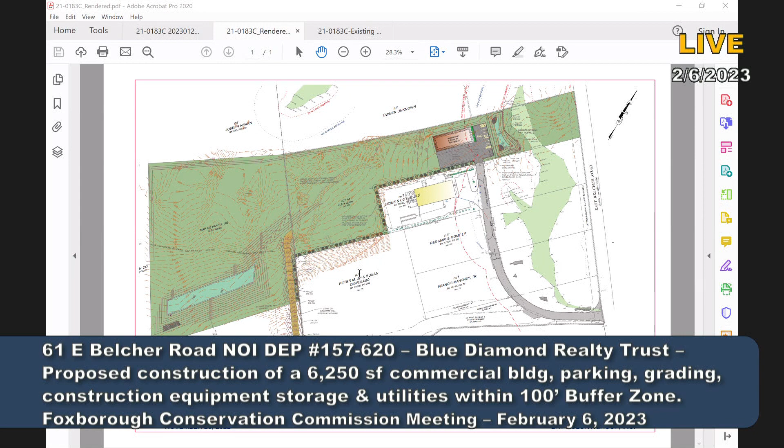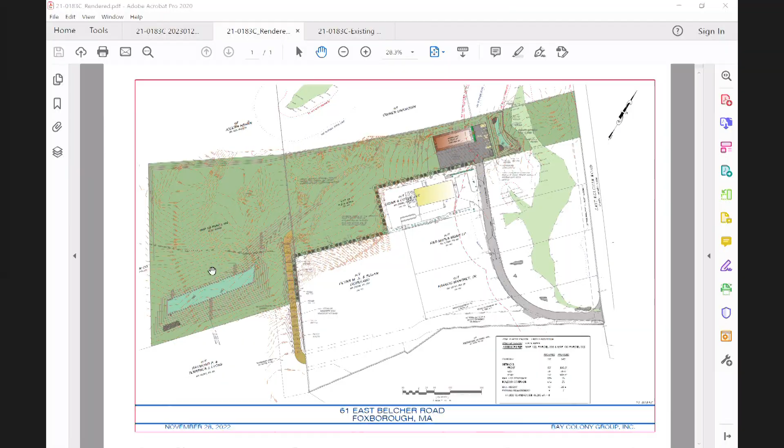61 East Belcher Road consists of two parcels totaling 9.57 acres. There's a front parcel that our client has owned, and a rear parcel our client just recently acquired. These parcels are located on the southwestern side of East Belcher Road, which is out here. The back parcel is currently undeveloped and consists of a wooded area, while the front parcel consists mostly of a gravel area.

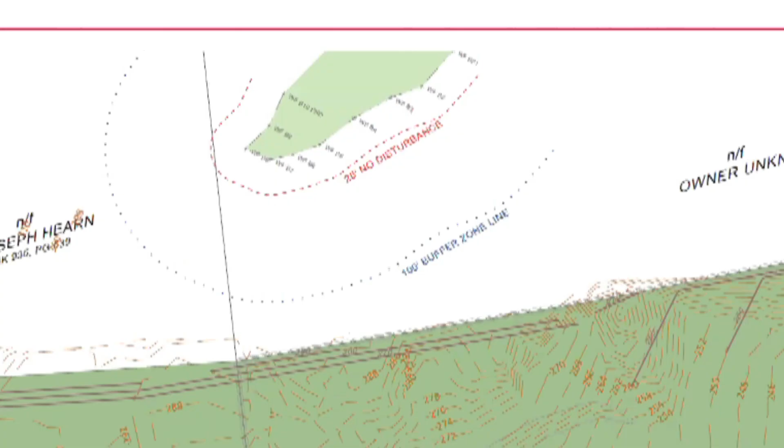And then there's a wood line—it's kind of hard to see, but it's right around here. Someday you're going to get smart enough to get that cursor in red so people can follow it. Let me zoom in for you. Okay, it's right there in blue.

This lot is serviced by a common driveway off of East Belcher Road. The property contains bordering vegetated wetlands in the front of the property, which we can see here. There's also wetlands to the north of the property out back, but the buffer zone doesn't cross onto our property at all. Our client is proposing construction of a 6,250 square foot warehouse along with associated parking, grading, and utilities.

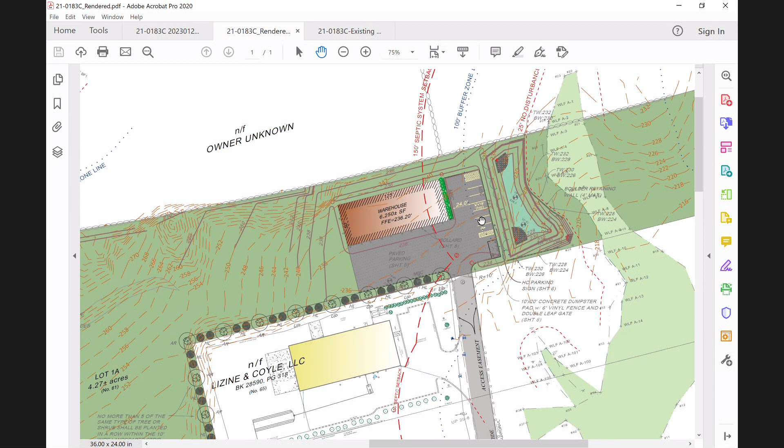A portion of the parking area, the grading, and the stormwater basin will be within the 100-foot buffer zone, shown here in the dots. You can see the portion of the parking area within it, and the stormwater basin is entirely within it. The parking area will sit about 78 feet from the wetland at its closest point, and grading will take place about 27 feet from the wetland at its closest point. In all, about 11,000 square feet of buffer zone will be altered due to this project. We're not proposing any work within the 25-foot no-disturb zone.

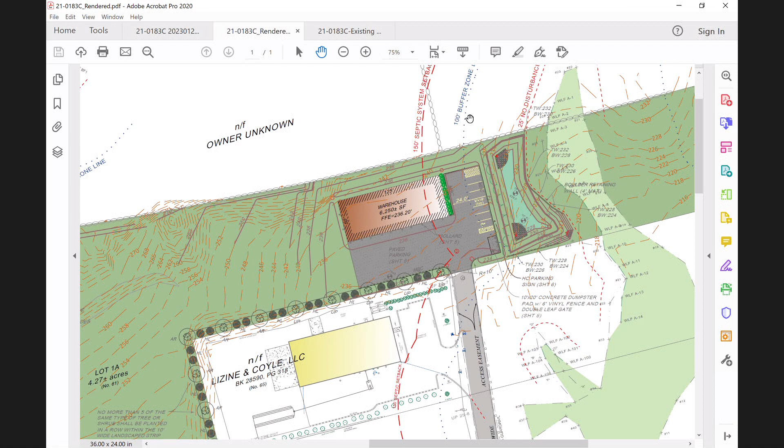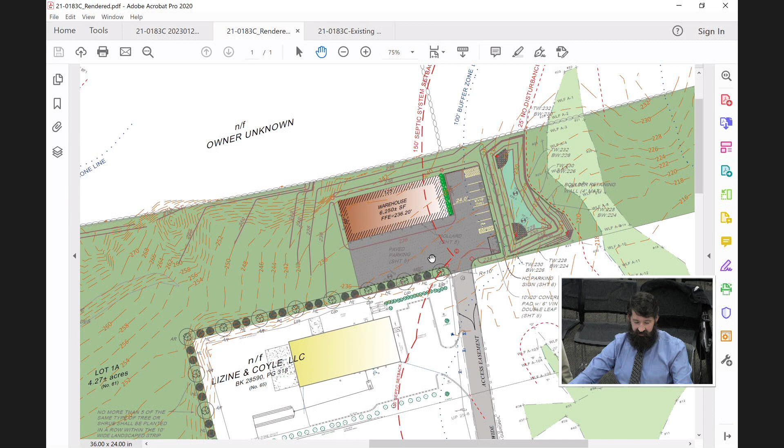This facility will be serviced by municipal water and a conventional septic system. I'm sorry I don't show the septic system on my rendering here, but if you have the site plan, you can turn to sheet 4. The septic system will be located in front of the building, and it will be at least 150 feet away from the wetland, which meets the commission setback.

The stormwater system for this project will consist of roof drains, deep sump catch basins, and a stormwater basin. Runoff from the parking area will be treated by the catch basins before being conveyed to the stormwater basin, and the roof runoff will be conveyed separately to the stormwater basin. The stormwater system has been designed to comply with DEP stormwater standards as well as the town of Foxborough's stormwater management bylaws. The town's consultant has also recently reviewed the stormwater system, and we've addressed all their comments. There are no major modifications to the site plan.

Erosion control for this project will consist of silt socks and silt sacks that will be installed prior to the start of construction and maintained until the project is complete and ground cover has been reestablished. A stabilized construction entrance is also proposed to prevent the tracking of sediment off-site.

This site also lies within a Natural Heritage and Endangered Species Program priority habitat. Our client has taken the necessary steps by working with Oxbow Associates to submit a Massachusetts Endangered Species Act review in April of 2022. The division reviewed the project and issued a permit in September of 2022 with the condition that a turtle protection plan be submitted. Oxbow Associates has prepared a Blandings turtle plan for the site, which was included in my notice of intent packet. That concludes my presentation.

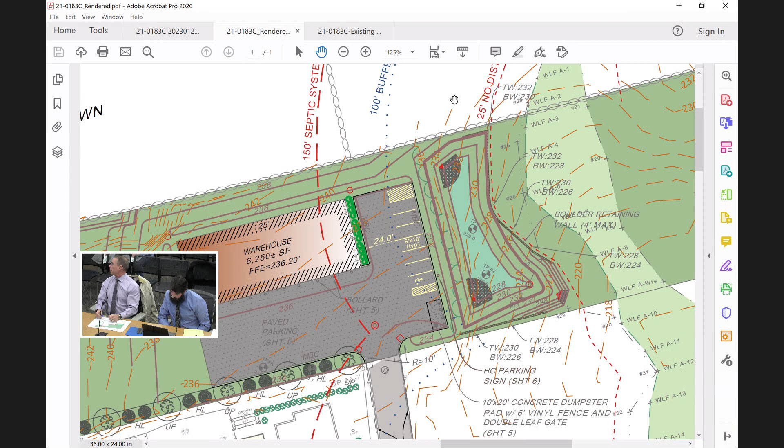So the blue right here is that wood line, and there's basically a build-up right there. And then after that wood line, nothing has been disturbed. So at this point, everything... what is that, is that 75 feet? Maybe 80, roughly, somewhere there. I mean, anything outside that hasn't been disturbed yet? No.

Now, getting back to the question of what our jurisdiction is, are you going to be grading on the other side of that pond as well? I'm sorry, it's kind of tough to tell. So this is a rock wall, or a wall that I have proposed right here. And then I kind of just grade off into catching those existing grades while trying to keep everything out of that 25-foot no disturb zone.

So you will be grading in that area then? Yeah, so we'll be grading that area, but we don't have any plans to go within that 25-foot no touch zone. On that basin, is that, I mean, I'm looking at that, that's what, 230 feet right now? Is that correct? Yeah, so the top of my basin, I'm pretty sure I have it at 234. But yeah, so I got 236, and then it slopes off pretty drastically to that berm down to 230, 228.

Is that similar to what it is right now then? Yes, for that it kind of follows the shape of what is out there right now. Okay, all right, yep, that's looking at the map without the work on, that's kind of what it looks like. Yeah, when we go out there you can see it's a pretty big build-up there. Yep.

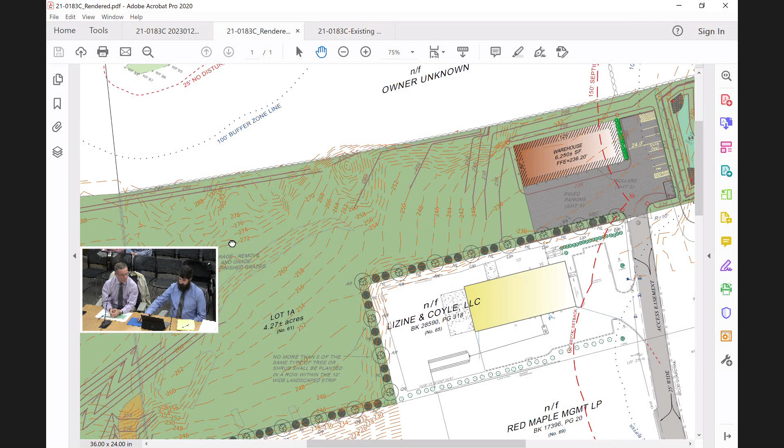The selectmen usually go with what the town engineer, the DPW director say. If they tell us 50 feet, then we'll have to deal with 50 feet. But the earth removal we're talking about is on the back lot, not the front lot. The front lot is pretty much done, except for down near the building. This area back here is where most of the work is going to take place.

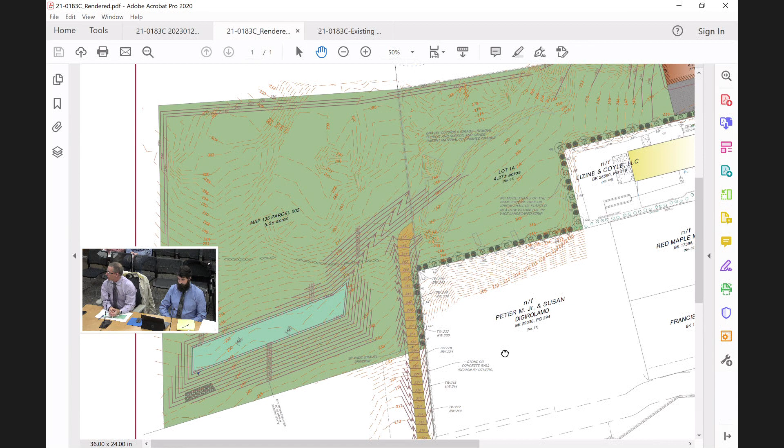When Jane said a 30-foot cut, that 30-foot cut is in the top left as you're looking at it, with the rocks in it. So that area there is the area where the gravel will be removed.

But buffer zones are meant for a reason - even these days, there's a reason for buffer zones with neighbors. And then you have some endangered species habitat out there, though. Well, they've got the Oxbow report, and they sign off from that. There's a possibility of Blanding's turtles coming in, and that's on wildlands, conservation land that they just received from some property owners. I think you still have that as unknown, right?

No, it's to the left there. The owner unknown is to the north - we don't know who the owner is, the town doesn't know who the owner is. But it's the same person, the same entity that sold the land to my client. They sold it to 3 different people - to my client, to the Lions Greenhouse on Spring Street, and to this Wildlands Trust you're talking about. So it's true, and I understand what you're saying, and it's a good point.

But we have no neighbors. It's not a buffer - typically a buffer is to protect you from looking at things, or noise, or whatever, but there's nothing out there, it's all vacant land. And if the selectmen decide 50 feet, then we'll have to do 50 feet - it's up to them. But right now, we're just showing 10, which is a zoning requirement.

Does anybody want to do a site walk that wasn't able to make it? Yeah, right, I would go, yep.

When is convenient? We never, no. Jeff, what's your schedule look like? I could do it tomorrow noonish, and I could do it Thursday easily, Dave?

Let's ask the critical question: what's the weather going to be like? Thursday's supposed to rain, 60% chance. Tomorrow's 40, Wednesday's 50, Friday is 60. Are you talking temperatures? Yeah, she's talking temperatures.

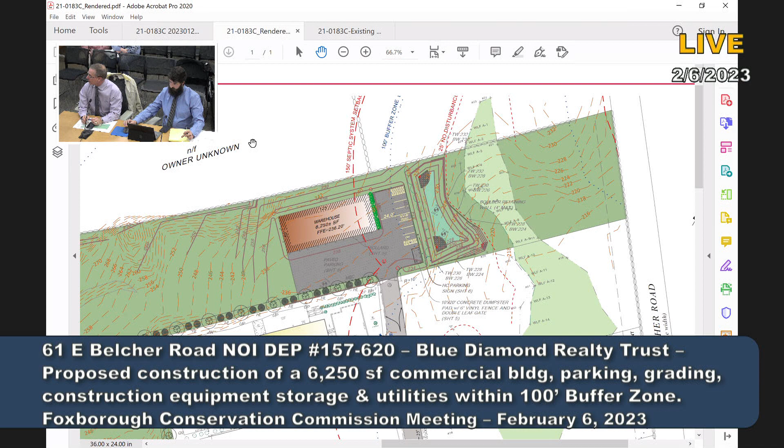So what do you want? We just, like anybody else, want to make maximum use of our property. You can see if we move it to the back, see the grade lines behind the building? That's more cutting if we had to flatten that out. And it fits - when you drive straight in the driveway, you pull right in there, and you don't have to go in front of the bays.

So the stuff on the big asphalt, that's truck bay access. Yes, that's the only paved place. The rest of the site will just be gravel. Now, does the fire department require access all around the buildings any longer?

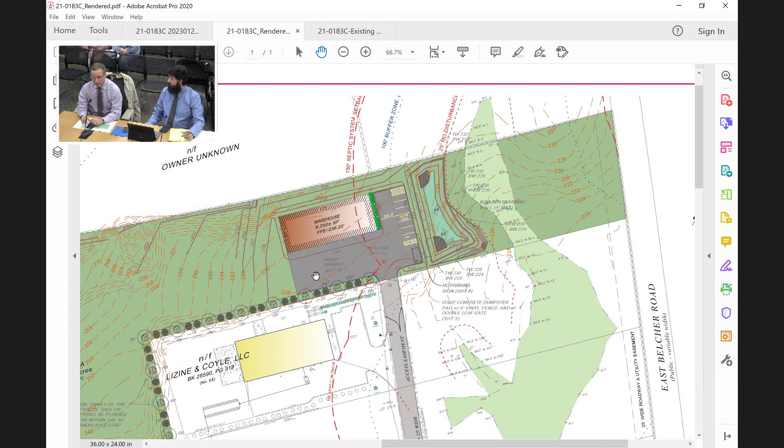I'm 90% sure what they want is around 3 sides of the building. But they'll also get to make comments to the planning board when we hear from them - I know I've heard sometimes they want full access. It just depends on the chief, whoever that is. Right now I think 3 is the magic number, but we'll know Thursday once we get the comments from them. I haven't seen any comments from any town staff. Diana usually sends them to us.

I've been living in ZBA world. So I come back to the same question: why can't they take all that paving on that side of the building, put it on the other side, turn the building around so there's less impact in the buffer zone?

Are you talking about moving the building to the right and the parking on the left? No, see the parking in front of the building where the green is? Take and put that on the backside of the building, or flip it around, whatever - don't fill in more and destroy the buffer zone. Because what they're going to do is wipe out the rest of the buffer zone, which adds more sunlight and everything coming into that wetland area.

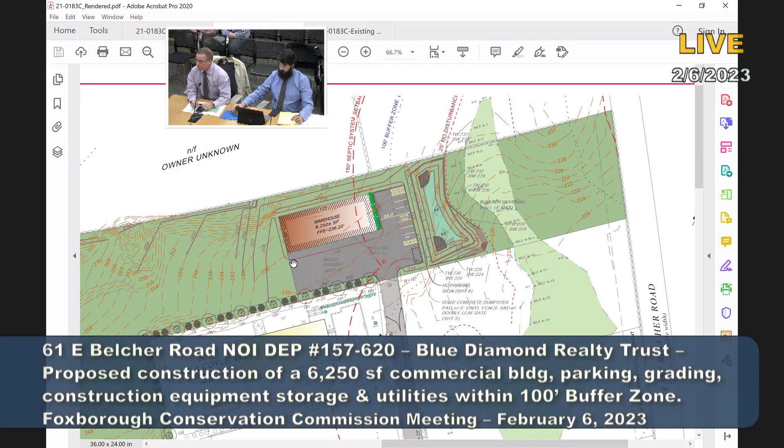I think where that parking is, though, isn't that already cleared? It is, yeah. That paving's just going on top of what's already gravel at the moment, right? Yes, yep.

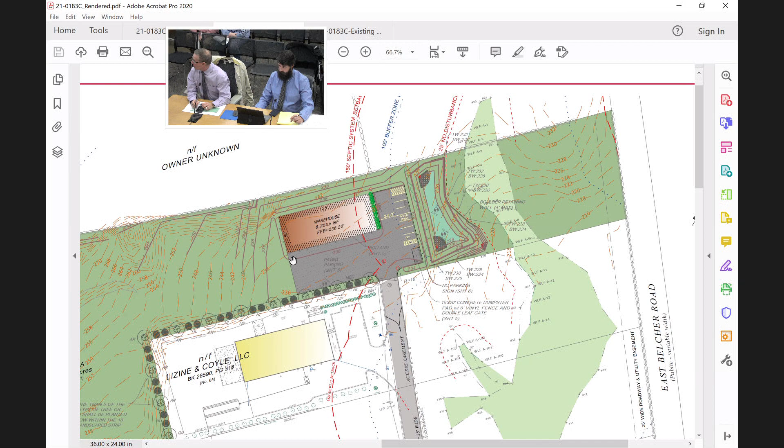I'm just trying to get it out of the buffer zone, because you're consuming 75 feet of wooded areas. But there are no woods there where that is now. No, I mean where his basin is - oh, where the basin is proposed, yeah. Basically you're wiping out 75 feet of buffer. Well, a little bit less than the other part of it. Are you going to be doing a 21E for all those stains and spots?

That stuff needs to be cleaned up. The good thing about pavement is that when it's captured and brought into a catch basin, it's treated. If you look at catch basins nowadays, back when we were kids, catch basins had open bottoms and the water just went through. Now they're all solid, they hold 4 feet of water and have an elbow, so greases and anything lighter than water sit up in there and typically just evaporate. They don't go out into the basin. So that's one of the positives why pavement is there. But no, we wouldn't typically do a 21E for just stains like that.

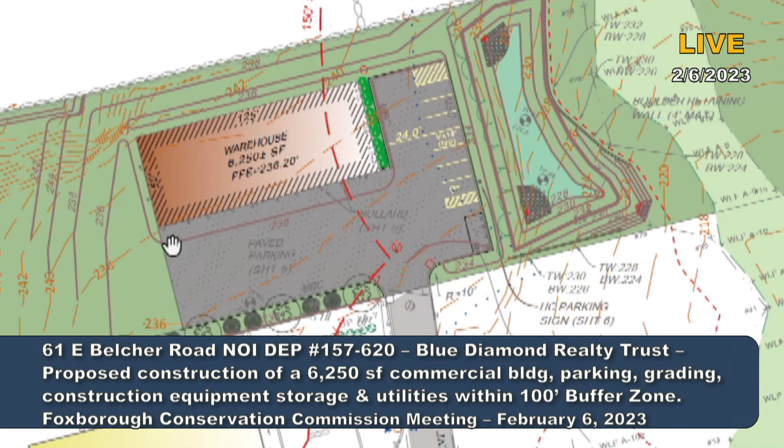Anything else? Nope. Motion to continue until our next meeting. Make that motion. Second? Discussion? Oh, before we do that, Jane, any final comment?

No, my report says it all. Bob, I'm really feeling pretty awful, I have to sign out. I can't continue this meeting, I gotta go to bed. I really feel terrible. Okay, hope you feel better, Jane. Alrighty, all right, thanks guys. Okay, feel better.

Any comments from the audience? Okay, I texted Gabby and asked her if the fire department wants access all around the building, and she says not anymore. She also said there's no comments from any departments yet, Bill.

Ah, 7:10 PM, you're still here? Excuse my excess.

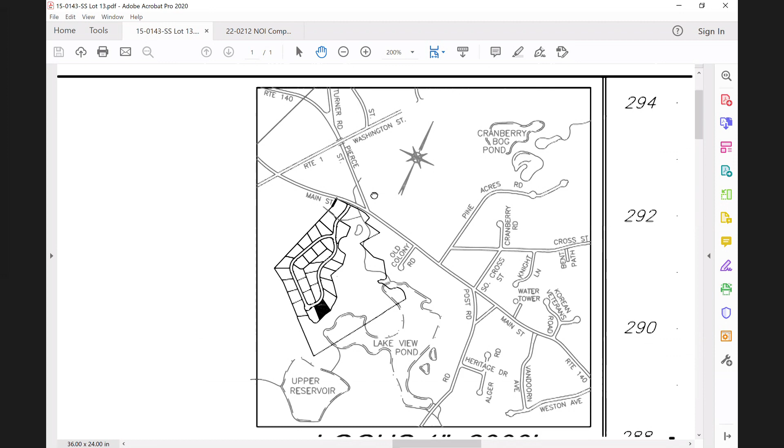What you have before you is a single-family home located at 18 Goodwin Drive. I'm going to zoom in here onto the locus plan to show you where it is in the subdivision, up in the Lawson Farm subdivision. If you came in the main road, you'd hit that first intersection. I don't know how many people have been up there lately, but the first phase is complete - all the houses have been built and most of the infrastructure and roadway.

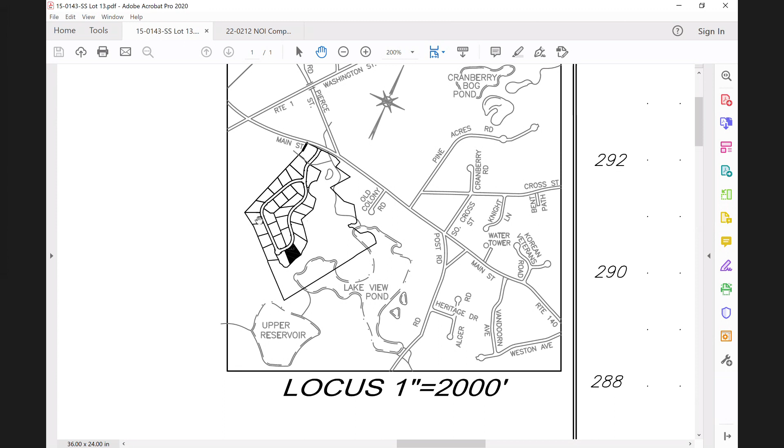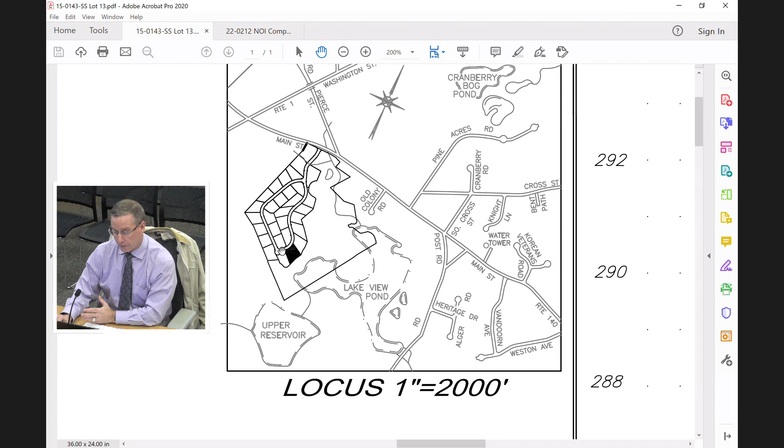Some sidewalk still needs to be put in, some islands at the entrance, but the roadways are in, trees, etc. If you came in, went up the hill, and came down here, this is the second phase that's just been built in the last couple of months. It's been paved pretty much to right about here. Number 18 is this lot down here. So you come down to the cul-de-sac, take the left, which is the only turn you can make, and it's not the first lot there, but the second lot on the left. Let me zoom back out.

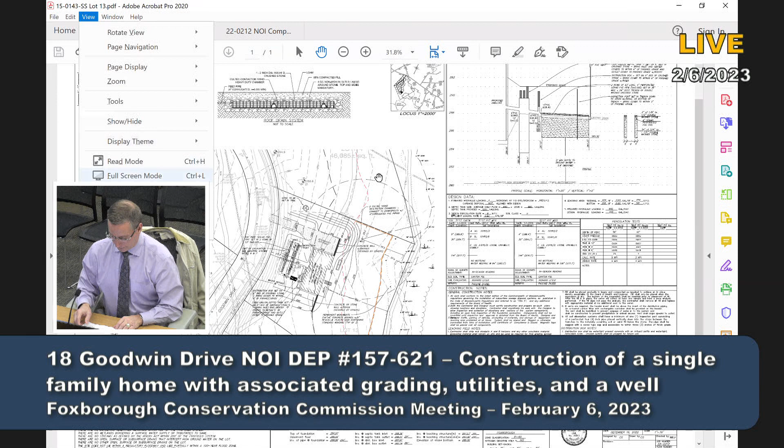This lot is undeveloped and contains about 52,000 square feet. It's in the R40 zoning district, which requires 40,000 square feet and 200 feet of frontage. There is some bordering vegetated wetland on the property in this corner, only about 450 square feet of it is in BVW. I don't know if the commissioners remember, but this was originally an 80-acre parcel, and when we subdivided it, we took about 40 acres and set it aside, which the commission will be owning someday, hopefully shortly. The quicker we get this built, the quicker we get it conveyed.

And what we did is we tried to cut out the lot lines so that there was little to no wetland on the lots. If you take a look up here or look at your plans, you can see there's a path along the back there, and that path is right along the edge of the property line.

So this lot is on the property. It faces what will be future conservation land, has a small portion of wetland on it, and we're going to propose to build a single-family home. I tried to put it in color this time to make it better for us.

This dashed red line is the 100-foot buffer zone line. One of the things I want to point out, Mr. O'Packer should be happy, is none of the house, there's no pavement, there's no structures within the 100-foot buffer zone. There's no driveway, there's no home. But we do grading within that area.

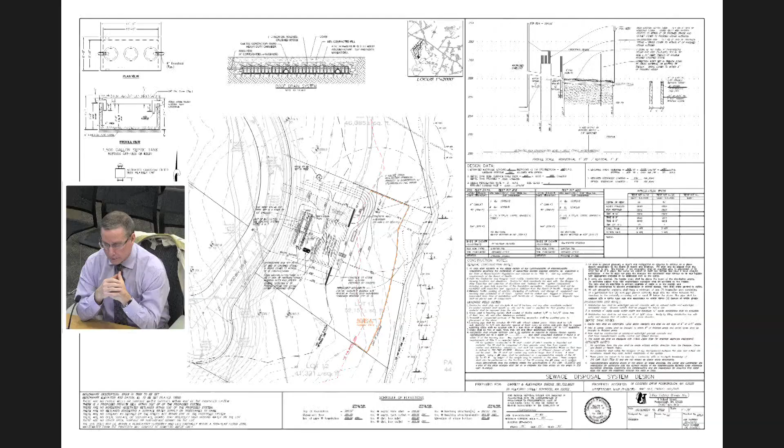So what happens is these lots are definite walkouts. And anybody who doesn't want to walk out is a little bit crazy, but that's okay. This is a walkout, and this is along the whole back of the property.

So you can see this area in here. This is buffer zone work. We're grading in this area here, but the remainder of the area, we are clearing. I know it's hard to see, but we are clearing this portion of the lot, and it's a lot of clearing along the back there.

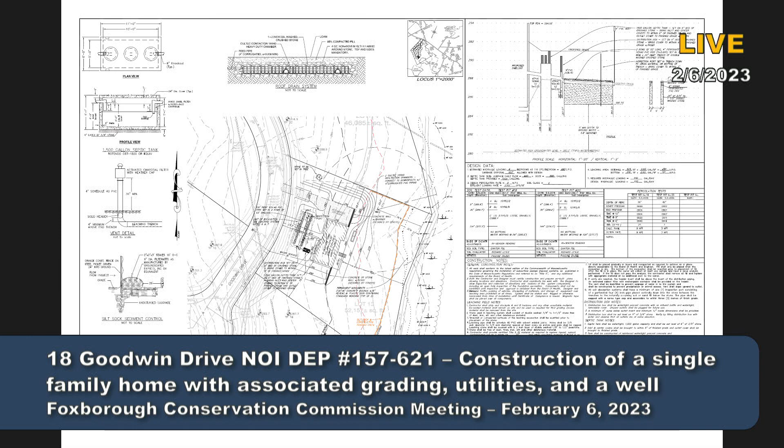We've stayed outside the 25-foot no disturb zone. But when you have a home like this, a young couple, they want to have a family, they want to have a yard, and what most people want to do, especially when they're buying big lots like this.

So the proposed home sits about 114 feet from the BVW at its closest point, and then the clearing and grading will take place about 32 feet from the BVW at its closest point, which is this area right in here.

This is the 25-foot line. You can see along here, only this portion of the lot has the 25-foot on it, and the remainder of it is well outside. But in this area here, where it kind of noses up into the lot, this is the area where it's closest clearing.

It's hard to see again, but you can see this note right here. There's a permanent monument there, there, there. And they're about 25 feet apart, and they're on the 25-foot no disturb line. And what they are, as you've seen them before, is they're concrete monuments.

We put into the ground, they're 3 feet. We leave about 6 inches sticking up, and we put those plaques on them. So this tells any homeowner, hey, look, it says don't go beyond this, basically, without permission of the commission.

So that area will be marked. And then this area will have erosion control fencing along the edge of it, as well as construction fencing, which is the exact same as what was required for the subdivision. It has the 9 inches of silt sock, and it has the orange construction fence. So if the contractor doesn't see the silt sock, you can't miss the construction fence, making sure there's no inadvertent activity beyond the limited clearing that we've marked out.

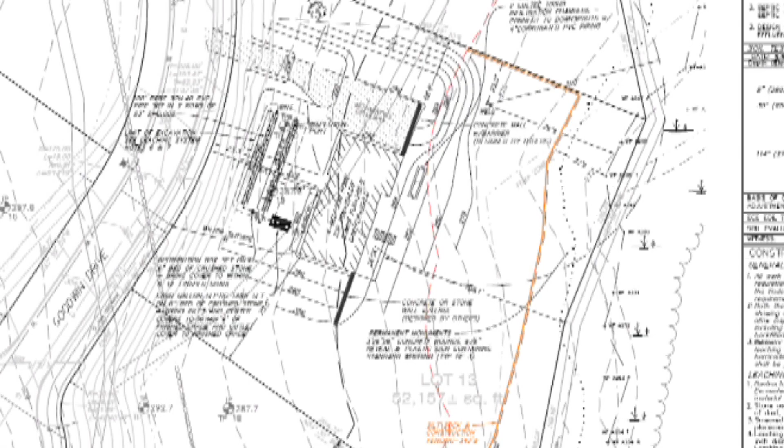I talked about the silt sock barrier, I talked about the monuments. The construction sequence for this type of project is very general until we have a contractor, but really, it's almost always the same. They'll cut the trees down, before they grub, they put the erosion control fence in, then they remove the stumps and grub it.

They bring the site to subgrade, which in this particular case is mostly in the front of the house. There will be some filling underneath the house. And over here on the north side, you can see there's a significant amount of filling in this area, and that's because of the driveway.

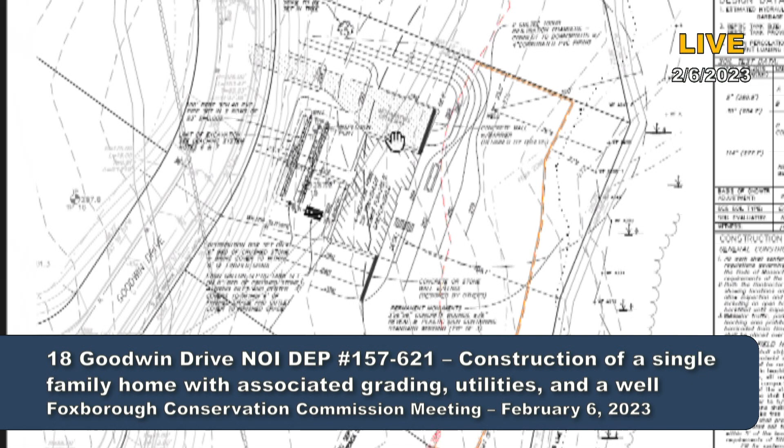Jane made some comments in her letter, or maybe it was an email to me, and she and I were talking about it. She said, why don't you move the grading over here to the south side of the house? That way we can push the grading further away from the wetlands and the buffer zone. Let me show you why I explained it to her.

I don't know if she passed it on to you. So if you look in this area here, right down here, we're at about elevation 297 feet above sea level. The driveway is at 292, so that's about a 5-foot drop. That's pretty steep. It doesn't sound like a lot, but it's a steep drop coming in and then going down, but then we flatten it out on the bottom.

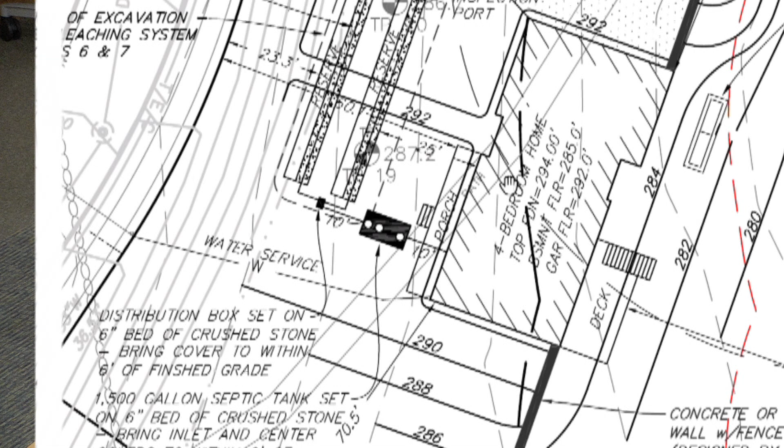Even that includes bringing in fill underneath this garage and driveway. So we picked the house up as much as we could, but even then the top of foundation is 294 above sea level, and in front here it's 298 above sea level. So that top of foundation is going to be about 4 feet below the road.

But when you go out there and look at that road, if you brought the driveway in over here, that elevation's 302, because this road is going down in that direction. So now we're at 302, and the garage floor is at 292, so now we have a 10-foot drop. That's just not acceptable.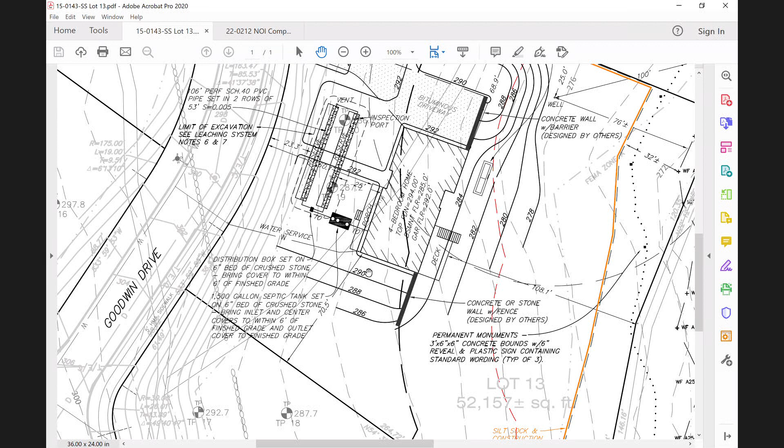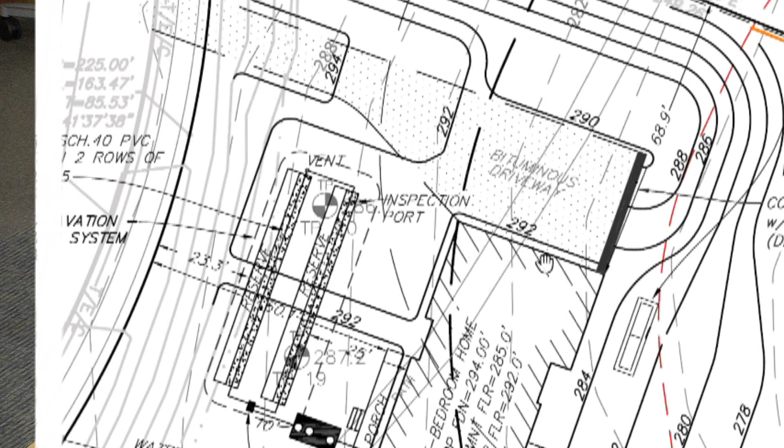It's not acceptable. I mean, you suck it up when you bought a house like that, but not when you're building new construction. We want to try and hold the grade to 5 or 6%, because we do live in New England, even though we haven't seen snow in 3 years. That's why, and I explained that to Jane, and she said thank you, gave me a comment back. So this is really the most practical area to put the driveway, based on the grades out there. Yes, we do have some grading back there, but we've put walls out there to minimize what's going on in the back.

There is a well. We're proposing a well on the lot, you can see that area there. At its closest point, the well is 76 feet from the wetlands, over here on the northeast corner.

Why the well? Is that irrigation? Oh, just irrigation. All right. I think that's the plan right now.

I thought we couldn't do irrigation anymore. What, irrigation with well water? I thought that was... oh no, you'd have a riot if they tried to do that. They did try and bring it, the Board of Health did consider it, because I had a neighbor that had it in our neighborhood, off of Linda Street, somebody had it there. Maybe I misheard. This was a while ago when we had the drought, because I planted a lawn that turned to weeds because I couldn't water.

I'll tell you what the bylaws are in Foxborough. You can't have irrigation as a business, but if you're a homeowner, it's all on you, and you can have a well for your house if you want it. Commercial, you cannot irrigate more than 10,000 square feet. So if you have a business with a big lawn... does it pertain to places like Lions? Lions is different, that's agricultural. I don't want to derail the conversation, I'm sorry. No, it's all in my head. But you can have an irrigation well without limitations in Foxborough.

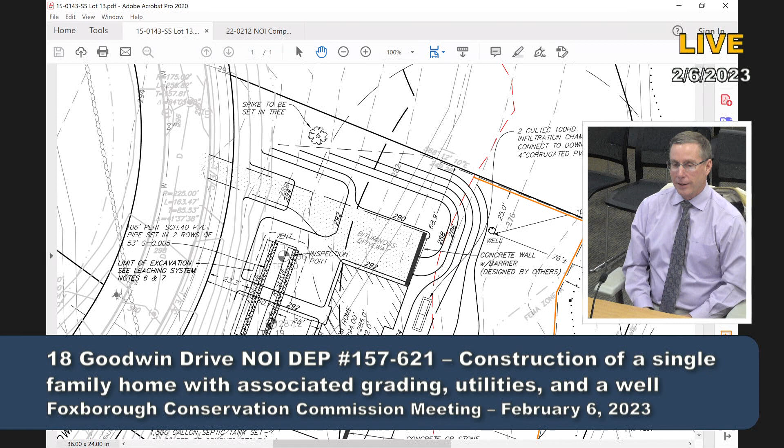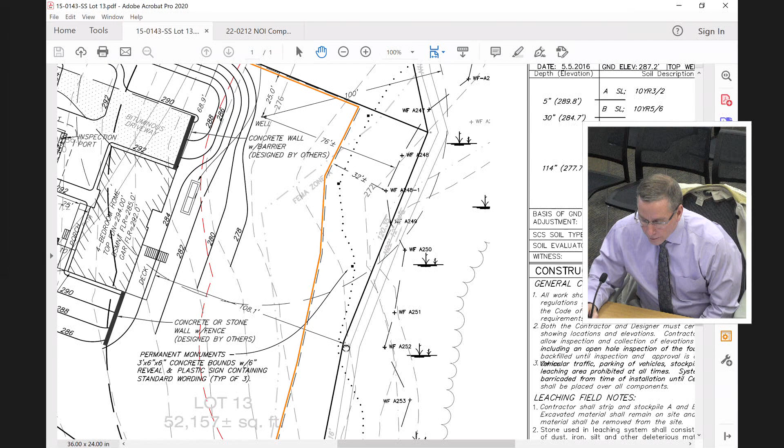Is there any boundary marker on the property line? Yes, in the back here, it's hard to see and it's not on these drawings, but it's on the drawings you approved. See this dot right here? Now come down here, see that dot? Now come down here, see that dot? That's a 3-foot high 6x6 post that will have a sign on it that says conservation land.

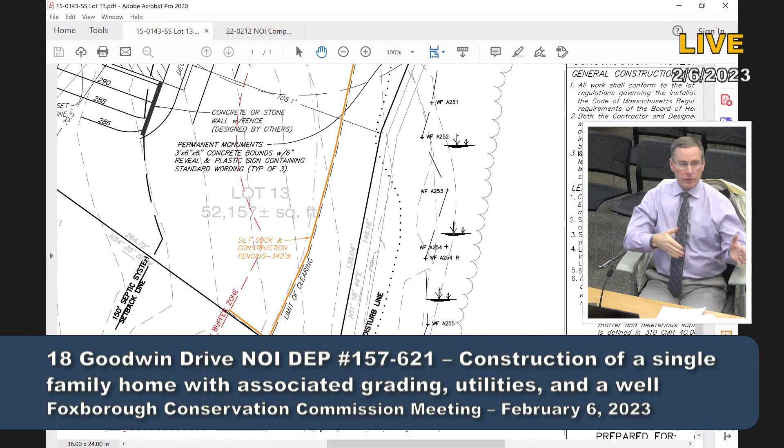We put that along the trail, anywhere there was an angle point, so when people are walking down the trail they'll know this is the limit of where you can go, don't go into people's backyards. My question was, there's no marker on the 25-foot there, but it's right at the corner, that edge.

Where you've got the other bound anyway, so it doesn't matter, because that's off our property. But on our property, here, here, and here. I was thinking right there at that point where the 25-foot crosses. Oh, right here. But you've got it right there anyway with the boundary line, so it doesn't matter.

A suggestion - as people walk down the pathway, that little finger of wetlands coming in there means they're going to end up on private property. I was thinking a suggestion might be to work with Jane and have the homeowner build an appropriate walkway over that wetland tongue there, which would keep them off private property. Otherwise they're going to be walking around that.

It wasn't that wet, though. That path is so obvious in that area now - Jane and I were walking out there and it was wet, really. That tongue that comes in there.

I think the developer could probably be asked to help do that. I'll talk to Bobby, he'll be fine. I'll have him talk to Jane, see what she wants to do. Maybe some stones, some rocks, I don't know what you want.

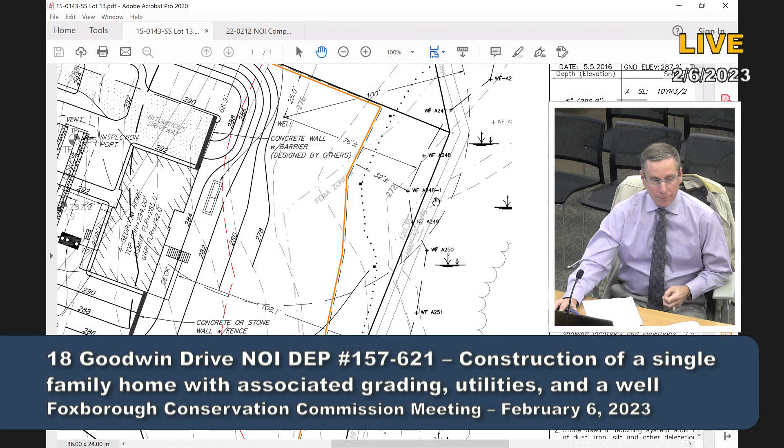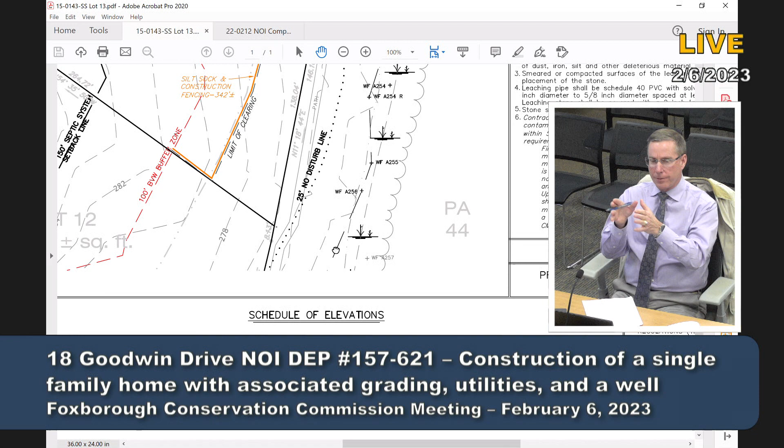It'd be more noticeable, I thought you had them a little bit longer. No, the concrete bounds are 3 feet. You can buy 4-foot granite bounds, but much more difficult to put in. Are the markers wood? No, concrete - these are concrete bounds, the ones we've used on all your projects, like London Estates, which we just did on that side road to the left. We put those along the yard. We can stick them up further if needed.

But, you know, the deal is, if you stick them up further, frost will probably push them out of the ground. Or you can knock them off, and I mean, 6 inches is...

They can be found, I guess, at that point, if we're looking for them. They're for the homeowner, not for the public.

Last question. Off of the cul-de-sac, next to that lot on the left, is there a way down to that path, like we walked? No, it won't be. So the way it's gonna work... I know you weren't on the board, the commission, at the time.

So, you guys know the area, you come in off Lakeview, and that's how you get there, or you come in off of Old Colony Road, you come in that way. So the deal that the developer worked out with the planning board, and I know the commission had input, is...

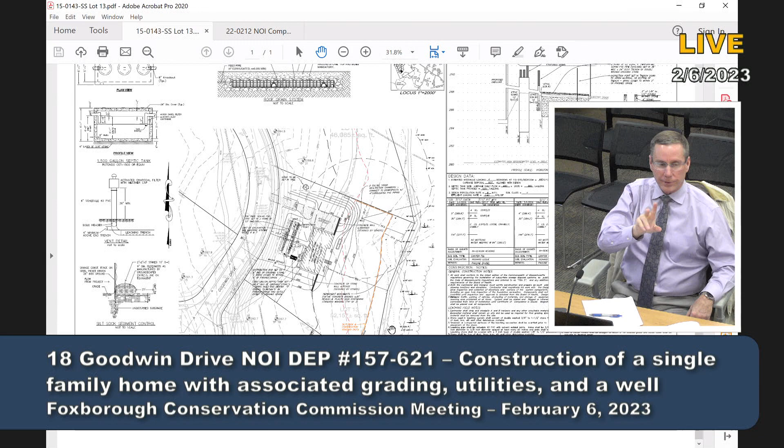This land is gonna be conveyed to the commission, and then one of 2 things has to happen. He has to provide access to the paths through the subdivision, or give you 10 grand so you can improve access wherever you want in town.

And he has not made a public announcement of what he's going to do. Is there a time, a date, on when it has to be done? No, no, no. But I would, you know, trick your...

Trick is, he can't get the roads accepted without an order of certificate of compliance. So, the way it normally works is, once everything's done, everything gets passed off, everything gets conveyed, and then the town accepts it.

I think this is Old Colony Road here. He's getting ready to move into the 3rd phase too, so it's good. Does it do a big loop? Does it go all the way around?

Got it. So the whole section that's cleared, like next to the driveway, to the lot line, is that all gonna be lawn too? Yes, down to that. I know they want a big lawn, but I know, like if they went sort of from the corner of the driveway and left that...

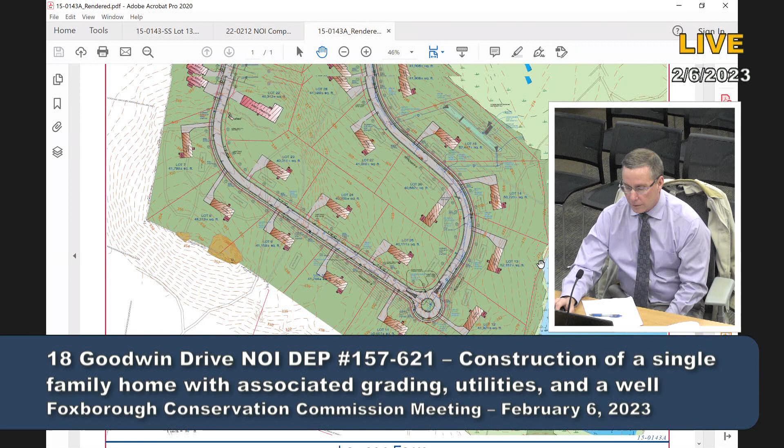Not just lawn, I was just putting this up in case you wanted to ask questions. Here's the path, it comes in from Lakeview Road, and then it skirts along the edge here.

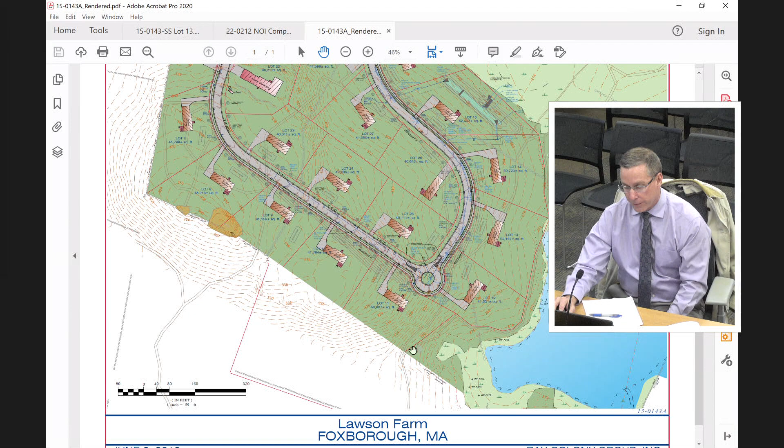There still is, but it kind of ends right there because it's all been knocked out. But you stay on this path, it goes around, and then it shoots up here in this direction.

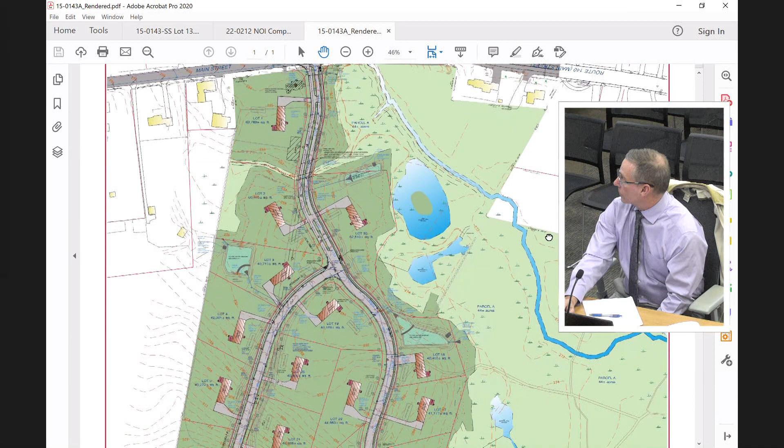I can't see because, yeah, but you can see how it goes through Lakeview, does it have Old Colony on there? No, it's just off of it, isn't there? It's further to the right. Yeah, it's just off of it. But that's where it connects in.

And then this comes over here toward this basin here, which would be, this is the 3rd phase in this area here. So if I was a betting man, if there was gonna be access, it's gonna be over in this area here.

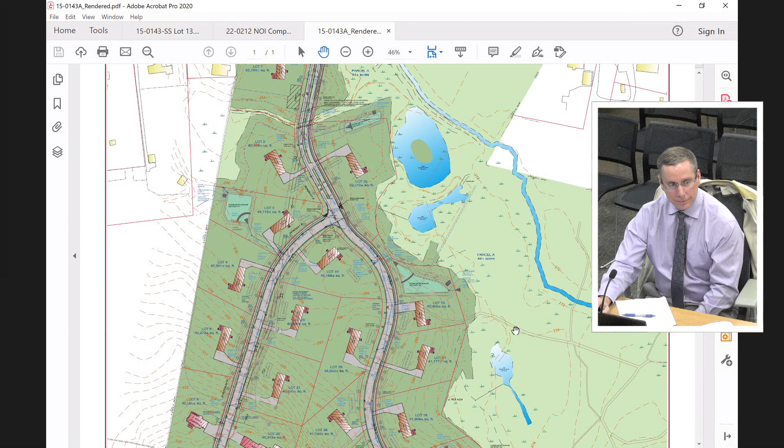Okay, that basin already in? No. And there's another one down further, closer to this house? This one's in. That one's in? Yeah, this one's in, it's got this big pile of loam right there. This one's in, and the road ends right here.

And we're talking about this lot right here. So the road ends right here, we're stopping right here. Oh, has it gone that far? Okay, all right. Yeah, we had to take it that far to put this basin in there, and get the drainage coming through here.

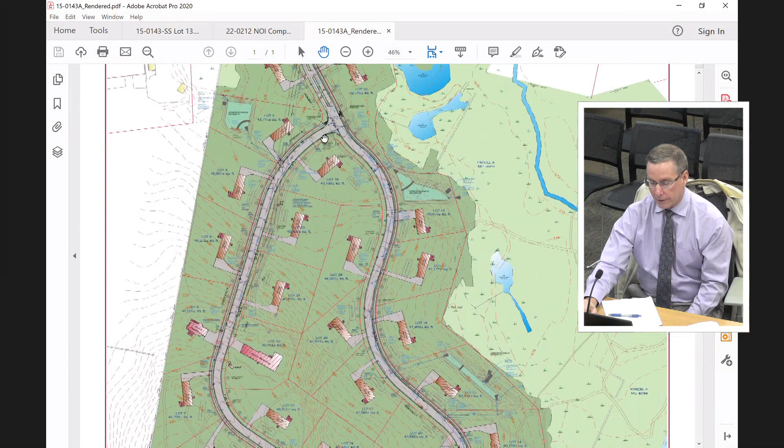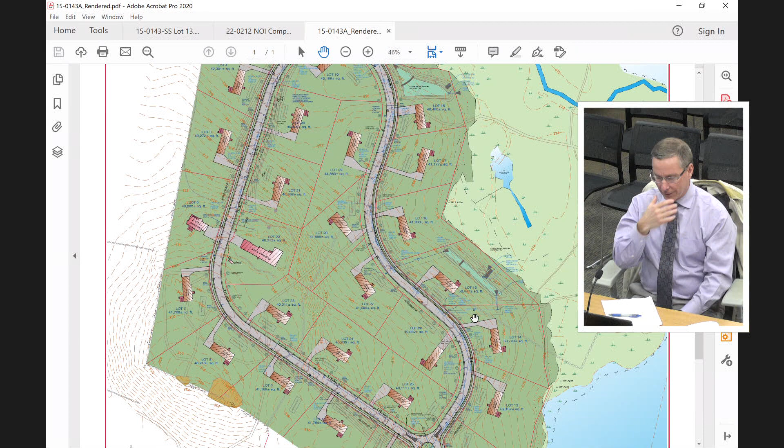So we're going to the planning board Thursday night to ask them to extend the permit, which ends in April for them. And if they say yes, which we fully expect them to do, they will be in there building this last section of roadway and trying to get those lots sold, which would be awesome, getting this thing finished and done, so you don't have an issue like Dudley Hill Estates, which took 20 years to get built out.

I'm sorry, let me go back, Rebecca, to what you were asking me.

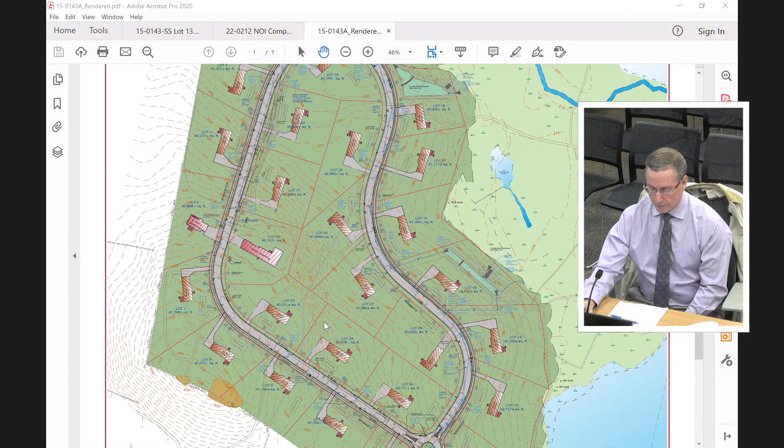This right here - I was just thinking about the area of the lawn that's behind and next to the driveway, that's the section that comes closest to the wetland. If they didn't make that all lawn, they'd still have a lot of lawn there, and it would provide a bit more of a buffer, because that's the area closest to the wetland. It's nice that you have like 50 feet on the rest of it.

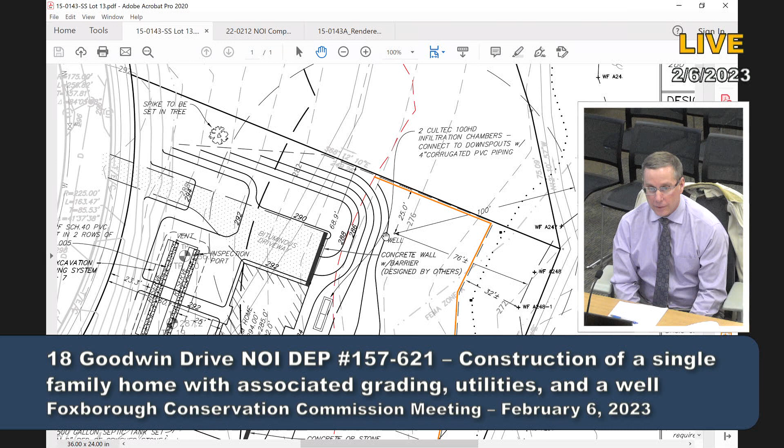Well, the issue is in that area we have a 10-foot fill, we're filling 10 feet and grading it down. So there's not much, lawn is the easiest thing to maintain, and it's all about maintenance. I don't know what else we can do in that area - a perennial garden or a bee garden, there's other stuff that's pleasing to the eye that can go in as well.

The point is lawn just equals nitrogen and phosphorus, right? And that's a big slope. So it's nice having the lake there, but if you don't want that to become green slime by August, that's the reason why I want heavy vegetation put in there.

I don't know that we can require that, but I think my clients are here and they hear it, and they understand, they don't want it to be slimy either - that's the value of their property. So I think if we can leave it to them to work in that area there.

I assume, Bill, that you're going to have the water come down the driveway and pitch to the north, garage doors to the opposite side of the driveway, not off the edge? So the garage doors are at 292, you can see the end of the driveway is 290, so it's pitched off in that direction. It's got a 100-foot run before it hits the wetland - you can see the red line there.

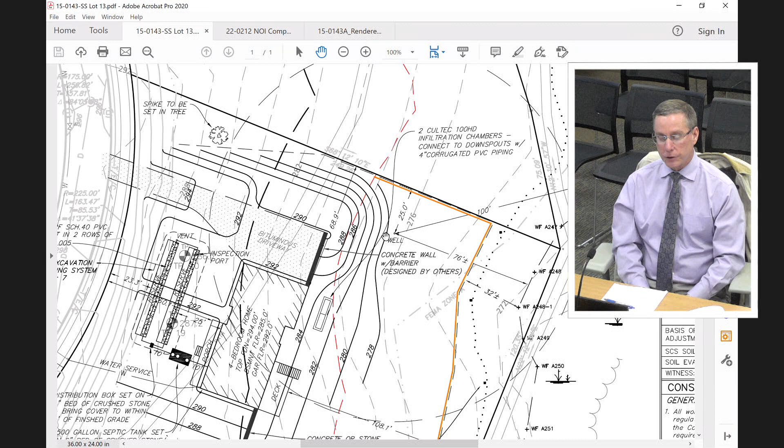I didn't mention this, but all the roof drains, as always, will be connected together and infiltrated into the ground. Every lot in this subdivision, and in any subdivision lately for the last 15, 20 years, will have that type of system - Cultec infiltration chambers. And that is also just outside the 100-foot buffer.

Anything else? No. Any questions from the audience?

Motion to close the hearing. Do I hear a second? Second. Discussion? All in favor? Aye. Opposed? None. Diana, do you have a signature page? I have a signature page. Okay.

Somebody want to make a motion? Sign the order of conditions? Approve. I make a motion to approve the order of conditions for 18 Goodwin Drive, DEP 157-621. Second. Discussion? All in favor? Opposed? None. Thank you very much.

I'll be back. Okay. Moving right along. Jeff, what's your deadline? About 45 minutes. Okay, all right.

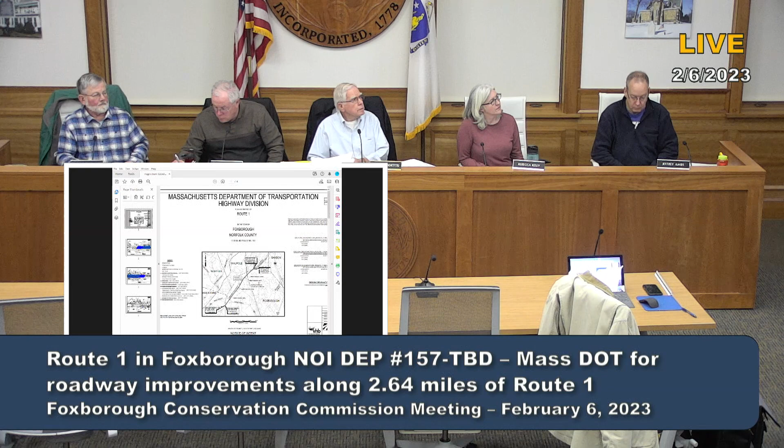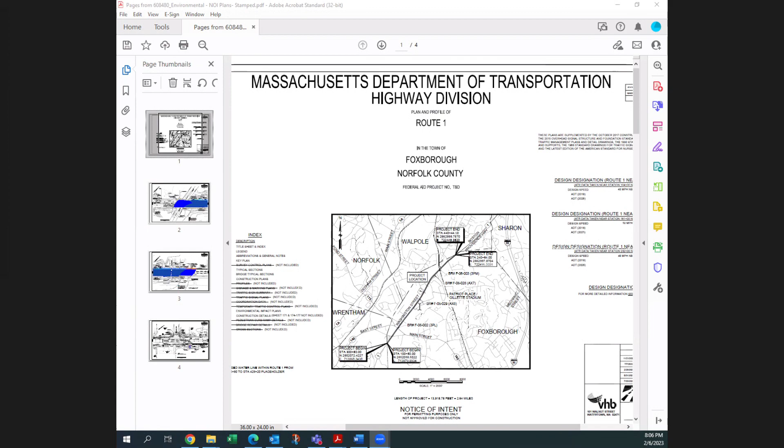So I do have a few relevant sheets from the plans to share. This is a roadway improvement project along Route 1 between the Walpole and Wrentham town lines, all within Foxborough. There are several resource areas along the project limits where the work is going to be within the 100-foot buffer zone to BVW and Bank, but there's only two locations in particular where we actually have work in resource areas.

The work by the Neponset River. This is the crossing under Route 1 before it goes in the vicinity of Gillette Stadium.

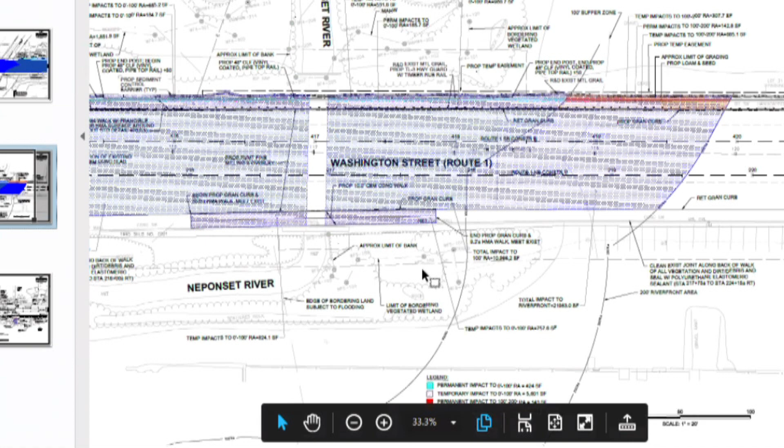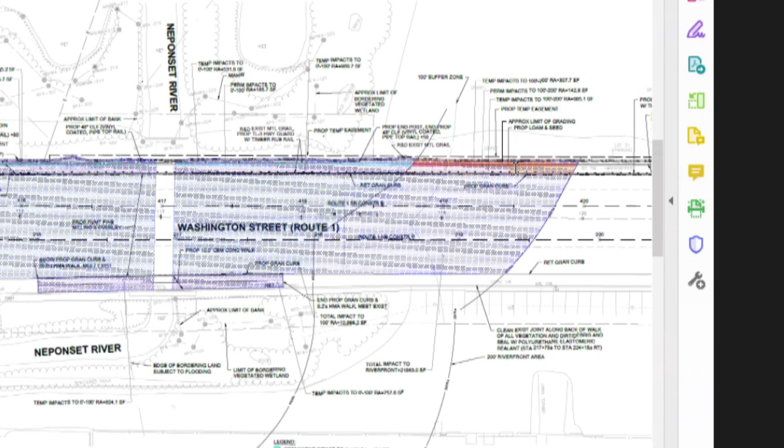This is the portion of the project limits within the riverfront area associated with the Neponset River. A lot of the bulk of the work is pavement milling and overlay along the roadway corridor. There is some minor permanent impact to the riverfront area associated with work needed to reconstruct sections of the sidewalk in this area. Other temporary impacts are just associated with guardrail replacement and loam and seed installation along the shoulders. No work in the Neponset River or associated floodplain is proposed at this location.

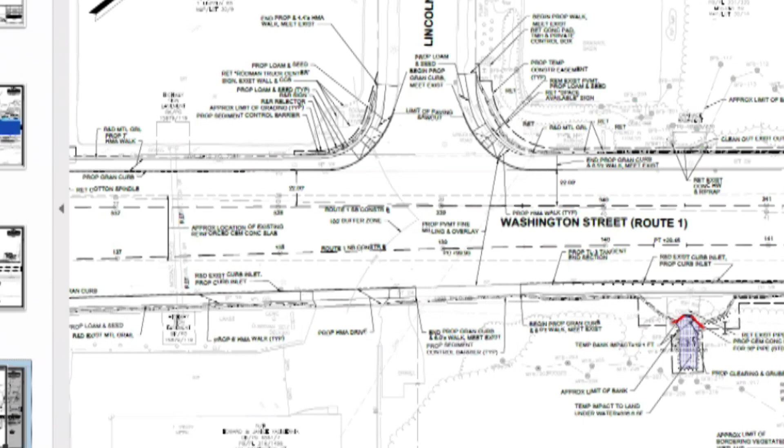The other area where we have work within a resource is right near the Lincoln Road intersection. There is an equalizer pipe between two wetland resource areas on either side of Route 1. One section of the headwall here has become quite deteriorated and has accumulated a lot of sediment and debris through the years. The plan is to clean out the trash and debris, as well as sediment, and reconstruct the headwall. This is about an 18-inch culvert.

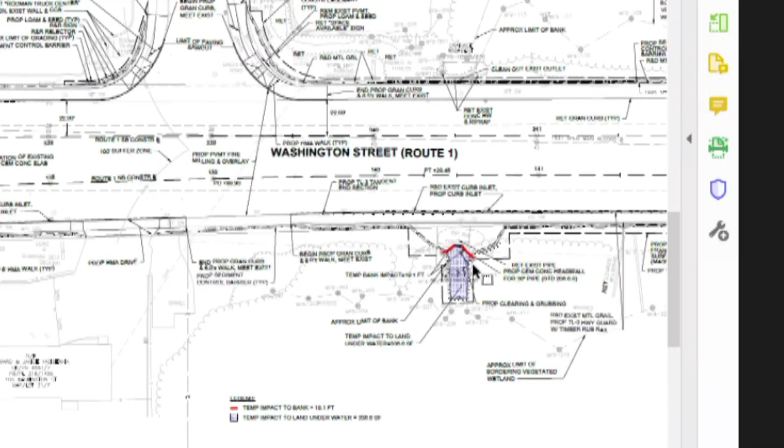There will be some temporary impact to land under water associated with reconstructing the channel of the stream. That will then be readjusted with a modified rock fill and covered with a natural substrate. There's no work proposed in the bordering vegetated wetland in this area; it's all contained within this channel.

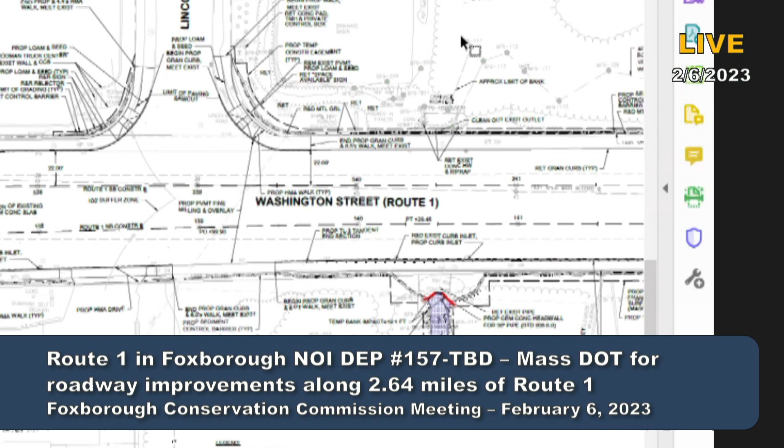In all other areas along the project limits, we are proposing erosion and sedimentation controls between the limits of work and any wetlands along the corridor. This can also be permitted as a limited project under 10.53-3F, which allows for maintenance and repairs of existing roadways. At this point, I'll open things up to the commission for questions, and our engineers are here to answer more technical specific items.

Thank you for that. I guess the first question I have is, when do you plan to start construction?

MassDOT plans to put this out for public bidding later this summer. It could start as early as this late fall, but I would anticipate most of the work will start next spring. Do we have any questions for the board?

Jane and I looked at it, it's pretty straightforward. Dave? No, it's pretty straightforward. No, fixing the road, right? No. Yeah.

Their biggest problem will be any heavy rains on exposed new soil and seeds. It might wash out into the buffer areas. But they'll have silt controls out for that, so I don't foresee any problems. Actually, I don't have any problems with it. As I say, the agent and I discussed it, and I think she's all set with it.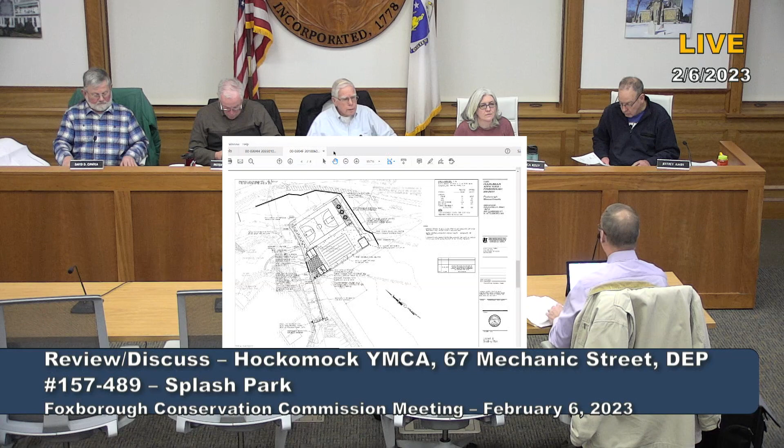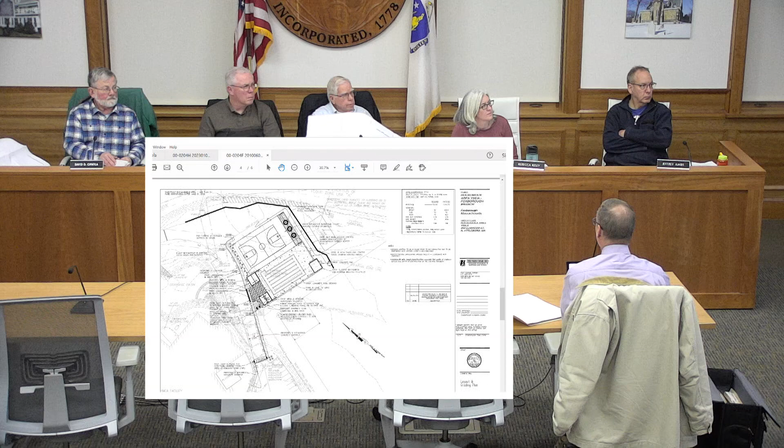Mr. Chairman, I'll add a little more detail to what Greg was saying. This was actually the third phase of the YMCA. The first phase was the building, the second phase was when they added the pool, and this was the third phase, the outdoor pool area. Let me share this — this is back in 2010. This area was basketball and tennis courts at the time. What we came in and asked the commission for was to take this portion here and turn it into a pool, continue to use this piece as basketball courts, and in this area back here was the splash park. This was the original design approved back in 2010.

We then came back for a minor modification, and as Greg pointed out, we eliminated the splash park at that time. We finished the project, I believe in 2013. We filed a request for a certificate of compliance, which included this work, but also included some remediation along the river just north of the site. If anyone's been there, as you come in on the Y it's heavily vegetated, but on your left is Robinson Brook, which starts over in Foxborough and heads to Mansfield. For some reason, we filed the request for certificate of compliance and then nothing happened — I don't know why I didn't follow up.

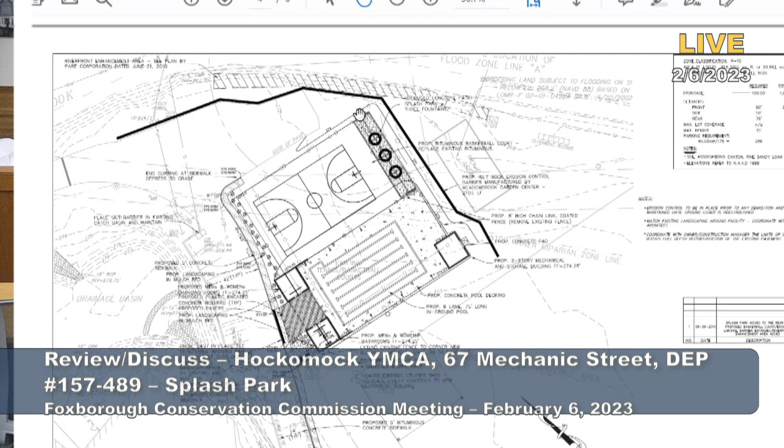We were going to come in two weeks ago before that wicked 1.5 inches of snow that canceled the meeting. That was embarrassing, I'm sorry. Okay, I mean, come on, we're from Massachusetts. That wasn't my request - it was a request of higher ups, I know. And that's okay, I had something in, it was either Wrentham or Sharon the same night - it also got canceled. But anyways, so this is the thing.

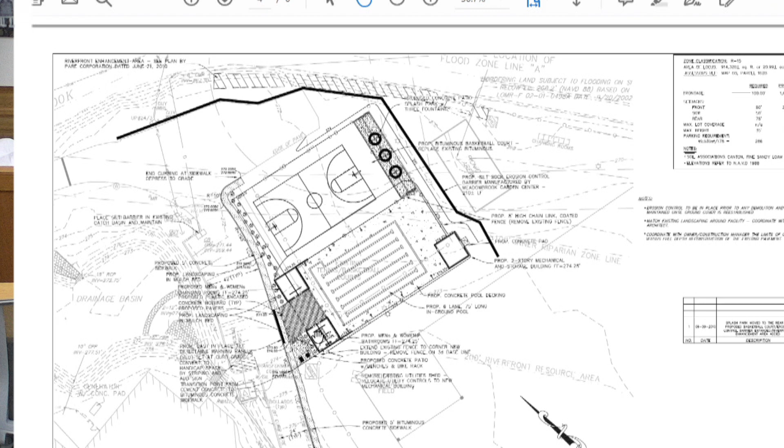You can see it, the pool has actually been built. It's a little bit different. This shows it as there was going to be two separate - I think one was going to be a boys' bathroom and a girls' changing room or whatever, and this was going to be the pump room. And then what's been changed - one of the modifications we showed you at the time - was this went to one building, in the same general area. So let me go now to the next one.

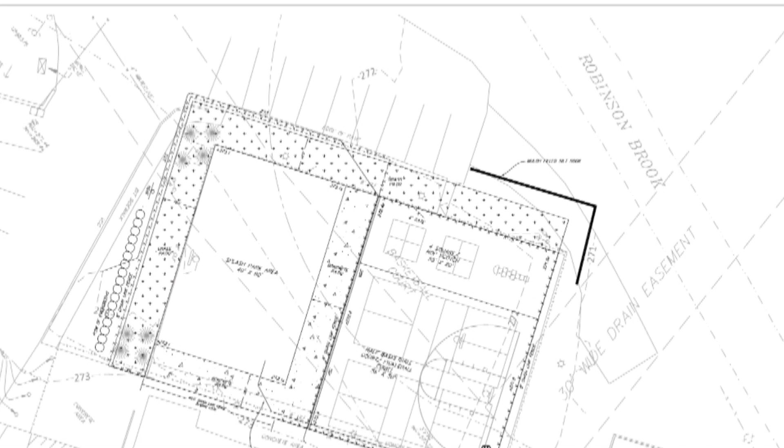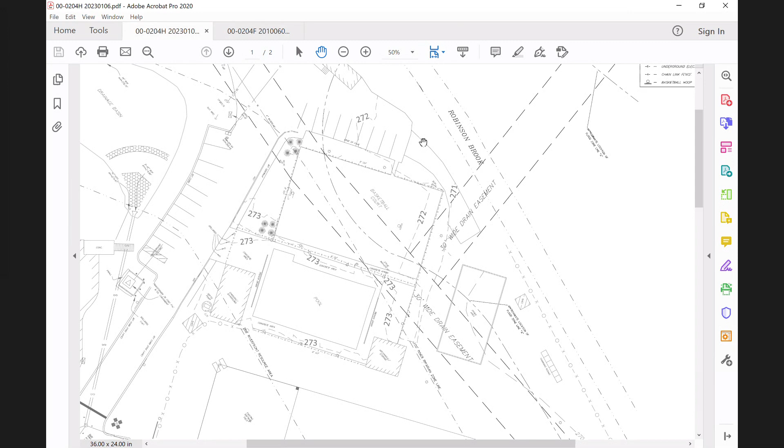So this is the existing conditions - actually, yeah, this is the existing conditions plan right in this area here, so that would be the first sheet that I gave you. And this area is the pool, and you can see that changed to one building, the mechanical room is still there, the basketball court is where it is, and then this area right here, which is not labeled - it should be - this is the gravel that was put in at some point.

Now where's Robinson Brook there? Right here. Okay, all right, this is Robinson Brook. Okay, all right, so that's that area there. So that's the existing conditions of what is built there now.

Let me also - is there a shed somewhere along there that was added? Right here, a trailer - this is a trailer that's right in the parking lot. And how close is that to Robinson Brook? It's pretty close, probably 75 feet, but it was supposedly built on the paved area - it's a trailer on wheels. And it was supposed to, my understanding was it was gonna be temporary. It's pretty permanent - been there for more than a few years, and we can discuss that when we try to clean up any other issues along there.

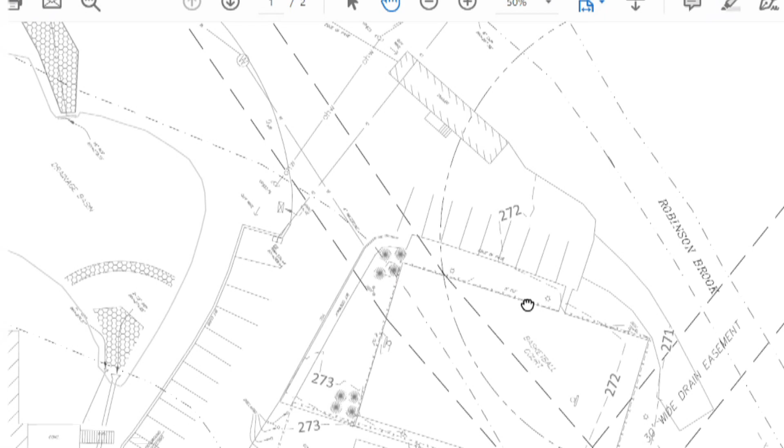But we have no proof of it, because Jane couldn't find any proof. We have a letter - when I submitted my request for a certificate of compliance, we filed a letter from the landscape company that did the work, as well as a notation from Pare, because they couldn't find certain plants, so they used others. So the short answer is yes. Did I ever see it? No, and if I saw it, I wouldn't know what I was looking at anyway. That's why we have the guy who did the plantings and Pare. But that was 10 years ago.

So that needs to be reviewed, and again, that could be something we need to deal with before the commission issues a certificate of compliance for the open order.

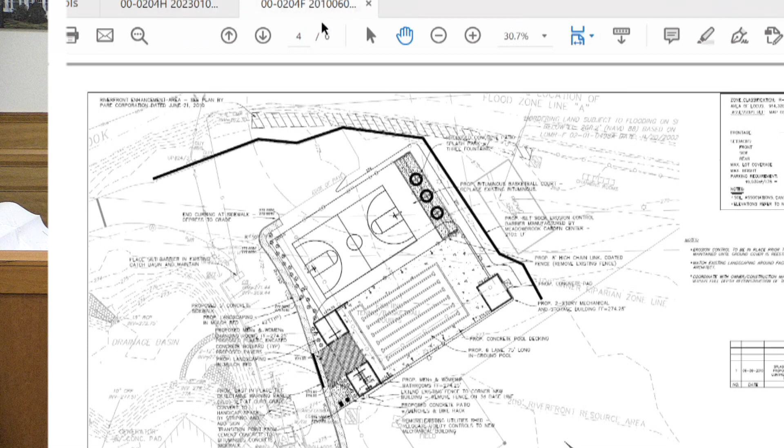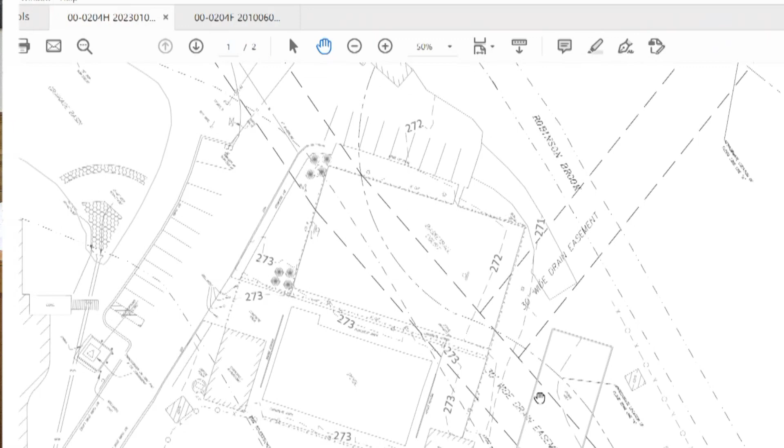Something that was added per your existing plan is that gravel area, road, path, or whatever. Yes, and it looks like it goes to the picnic area, what used to be picnic area, on the 2010 plan - still shown as that. There's the 2010 plan, and this shows it's still there. But that area needs work to get it back to where it was on the original plan. But this area right here, this basketball court - I wanted to show pictures.

Let me show you some photos. Why is that not showing? Okay, stop share. Share. We'll use this one as a good one.

So this is a picture - if you're coming in right here, this is the driveway coming in. There's the main building, there's the pump house in the back, there's the pool, this is the basketball court. So just to orient you to what we're talking about, all of the activity, all of the future pavement is going to take place on the existing pavement. Let me go back to this now.

So let me go to the next sheet, if you can flip through your sheets. So this shows - here's the pool, here's the changing area, here's the mechanical storage. This is the basketball net area. What we want to do is have 4 square hopscotch, whatever they're going to do in that area, and kind of a half basketball, pickleball area in this area. And this is the splash park. If you remember, in the original drawing the splash park was here, then we modified it, and in the approved drawing the splash park was in the back, and then it was eventually eliminated.

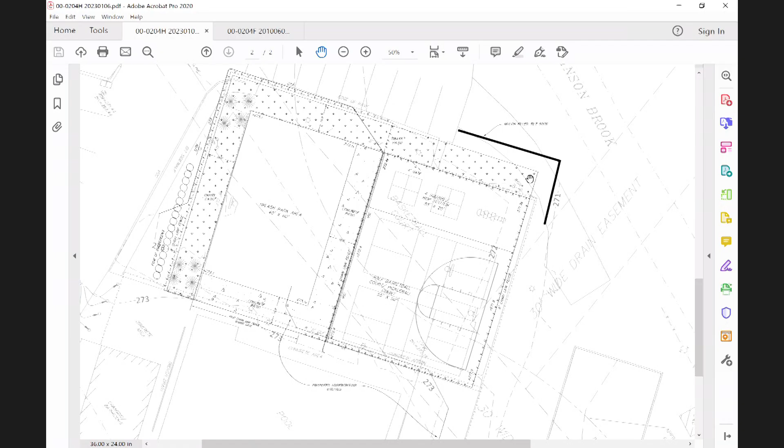So in this particular design, we want to stay on the existing pavement - splash park, basketball court, not going off of it. This area that's grass and shrubs is already grass and shrubs. There's no impervious area being added to it. We show some silt sock here because there will be some grassing, some landscaping there. We wanted to make sure it doesn't go toward the brook. Here's the grass, here's the gravel area we were talking about earlier that needs to be removed.

Let me now show you some cartoonish pictures of what the splash park will look like. These are just some renderings that were done for us. They're not exactly probably what will be, but it gives you a flavor for what it's going to look like.

I don't know why I can't get it up. Bill, do you need me to see if I can find a picture of it? No, I got it here, Greg. I have it up, I just can't call it up. Hold on, let me close some of these other windows, maybe that's the problem.

While you're doing that, Bill, is there anything at the edge of the pavement to keep the water from running down to the brook - right now and in the future? No, there's nothing on it. But it's also not like there's cars on it. So normally what we want to worry about is, like David was pointing out earlier, oil, grease and stuff. I know, but this is just kids on a basketball court. So we don't show anything other than the fact that there's no grade to it. It's more of a question of whether there's any erosion possibility, water running off, but there is a little bit there, which is what I was showing you on this. Let me go back to this.

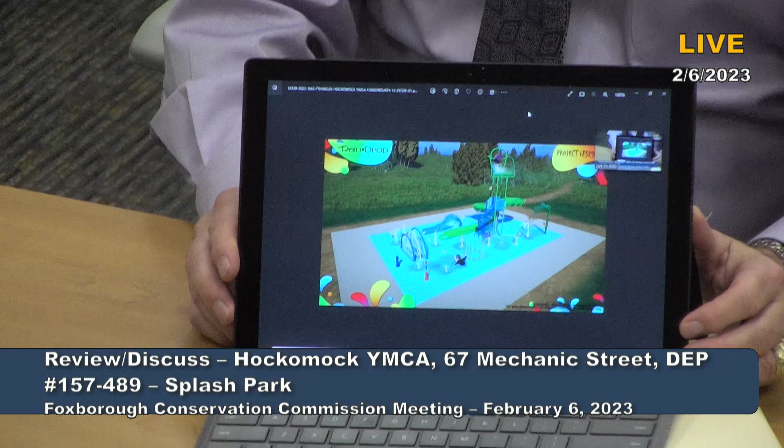Yep, yeah, that's what it kind of looks like. They have these toys in there. Make sure you show the camera. Okay, very good. Now, could you hold that so Mr. Beck can zoom in on it? That's what I said, make sure he shows the camera. Can you see that, Paul? Wow, look at that. Technology. Somebody's watching me.

Good, thank you, sir. So I guess what we're asking the commission this evening is whether it would be an appropriate way to move forward for us to file a request for determination just for this, which is on existing pavement. It's not any alteration other than some landscaping around the edges, and then we'll move forward and square away that order of conditions when the weather turns.

It will be the same time as this. It's just a question of we can't do it until the weather turns. So we'll get Jane out there whenever, March, April, for her to look at it. And then when we go in there and do this work, when we do the landscape portion of it, we'll fix the rest of that as well.

Anybody have any difficulties with that? No, I go with Jane's recommendation, request for determination, and somehow or another work out the piece of paper to close the old order, the expired order. I'll let her figure out the details on how to do that. She'll work with MACC, or we'll leave that to Jane. We'll get Bob Bunstein from the YMCA, the facilities guy, and he'll have his planting guy, whoever it is.

Actually, Pare did the plan, and I don't know the name of the company that did the work, but they can work that out together. And I'm very confident that by the time this thing opens, we should be pretty close, if not done, with fixing the other stuff, asking that to be closed.